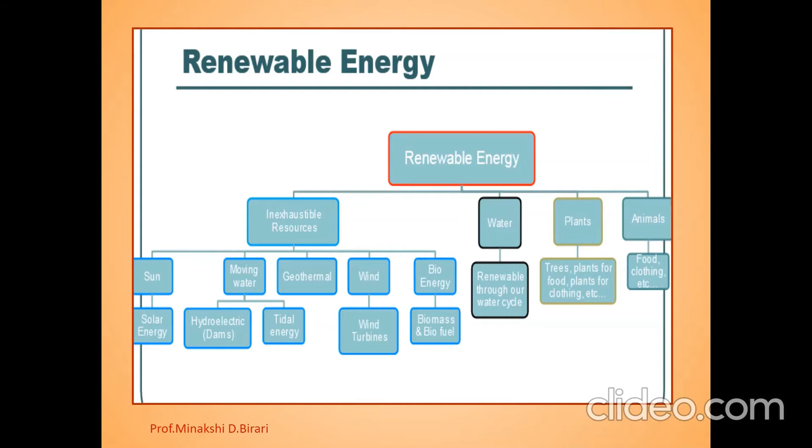On the other hand, renewable energies include solar energy, hydroelectric energy, tidal energy, wind power, biomass and biofuel. So these are the various renewable energy resources. Here we are talking about energy coming from solar rays, wind or water cycles, all theoretically unlimited on a human timescale.

Renewable energy resources include geothermal energy, biofuel, solar power, hydroelectric power and wind power.

Renewable energies are also often referred to as green energies or clean energies. Still, this doesn't mean that these energies aren't harmful to the environment and have zero impact. Nonetheless, they have a low environmental impact compared to fossil fuels. That's why they are increasingly becoming important elements in terms of sustainable development.

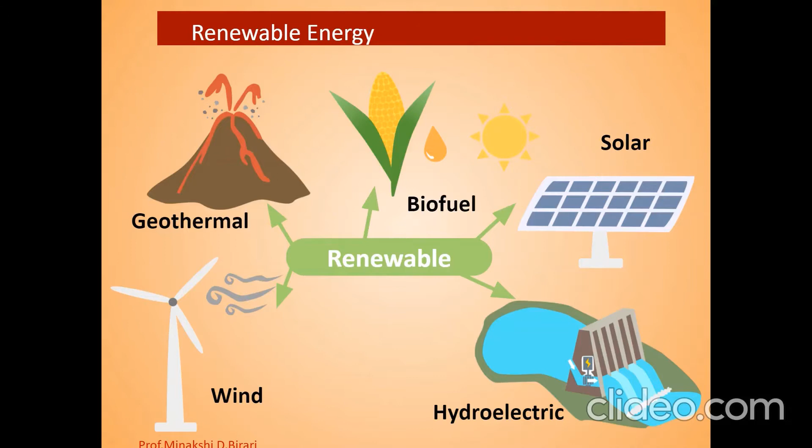We know that non-renewable energy sources won't last forever. Once we have used up our supply of oil, gas, coal and uranium, there will be no more. Because of the planet's increasing energy demand, we need to look for different ways of producing energy that is sustainable.

Renewable energy sources such as wind power, solar power, wave power, and geothermal energy are sustainable as they will not run out and can be reused again and again. That's why they are increasingly becoming important elements in terms of sustainable development.

Also, renewable energy resources do not release harmful greenhouse gases into the atmosphere, so they are much more environmentally friendly compared to non-renewable energy resources. Non-renewable energy resources can emit harmful gases into the atmosphere, whereas renewable energy resources do not release harmful greenhouse gases and pollutants into the atmosphere.

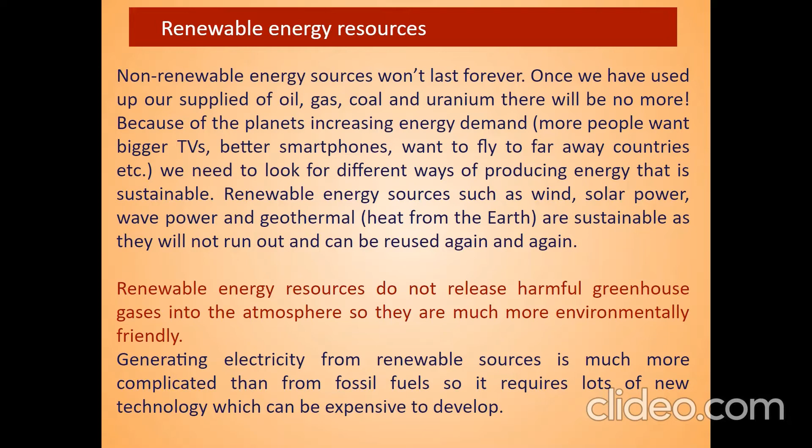Wind energy is a free renewable resource, so no matter how much is used today, there will still be the same supply in the future also. Wind energy is also a source of clean, non-polluting electricity.

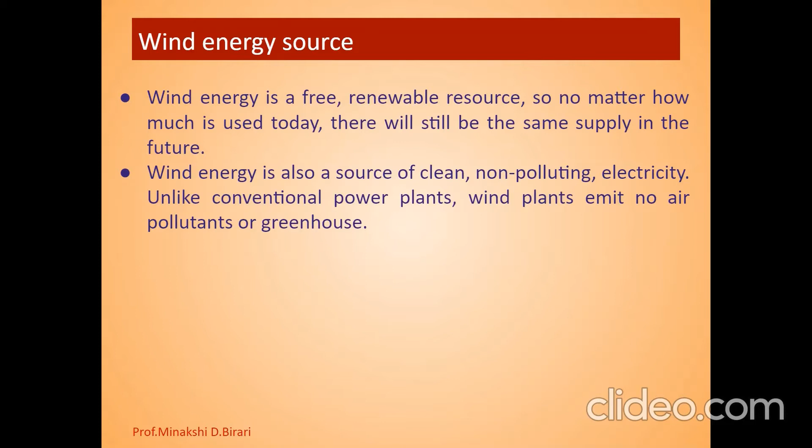Unlike conventional power plants, wind plants emit no air pollutants or greenhouse gases. It is a clean fuel source. Wind energy doesn't pollute the air like power plants that rely on combustion of fossil fuels such as coal or natural gas, which emit particulate matter, nitrogen oxides, sulfur dioxide, causing human health problems and economic damages.

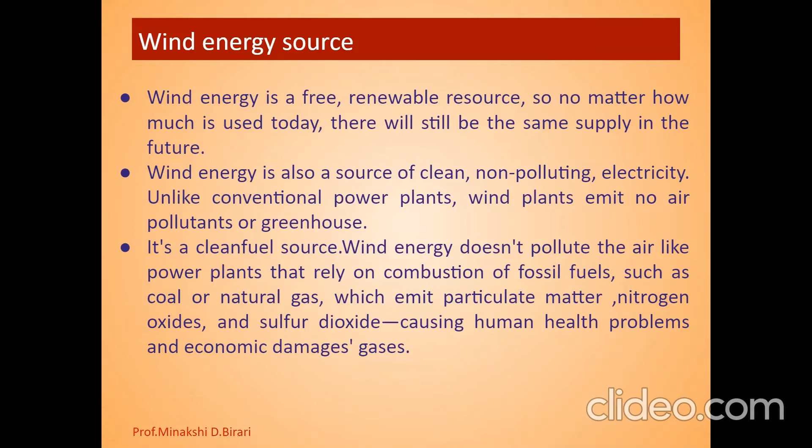Large windmills are called wind turbines. When the wind blows, the blades move and this spins a turbine which is connected to a generator which generates electricity. Wind farms are made up of lots of wind turbines, allowing lots of electricity to be generated. Wind farms are built in windy areas because if there is no wind, there is no generation of electricity.

Wind power is another renewable energy resource. The wind's kinetic energy makes turbines spin, creating mechanical movement, and afterward a generator transforms this mechanical energy into electricity. There are several types of wind renewable energies: onshore wind turbines, offshore wind turbines, and even floating wind turbines, but the operating principles are basically the same for all these types. We should remember that if there is no wind, there is no generation of electricity, so wind farms are built in windy areas.

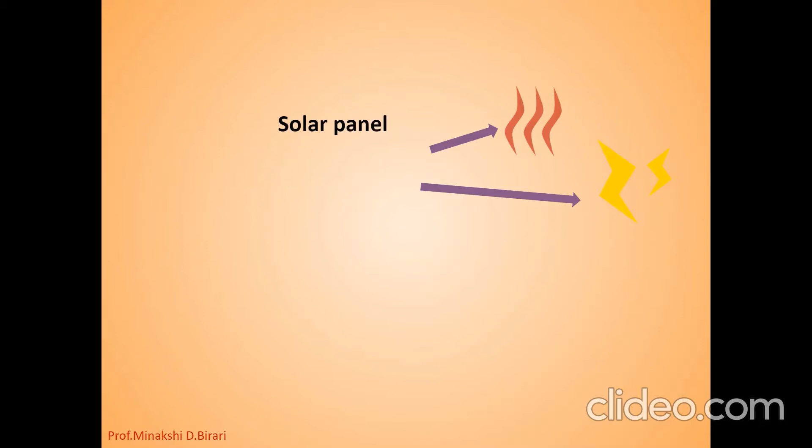This type of renewable energy comes directly from the capture of solar radiation. The solar radiation is absorbed by specific sensors using two possible operations: capturing sun rays and directly converting them into energy through photovoltaic solar panels, and also capturing, collecting and turning the sunlight into heat that warms up water or air. So these are the two operation modes by which sunlight is useful to generate heat and electricity.

Solar energy is from sunlight. Solar energy can be used to generate heat or electricity. Solar panels which are filled with water are used to produce heat. Photovoltaic cells are used to turn sunlight into electricity, capturing sun rays and directly converting them into energy through photovoltaic solar panels.

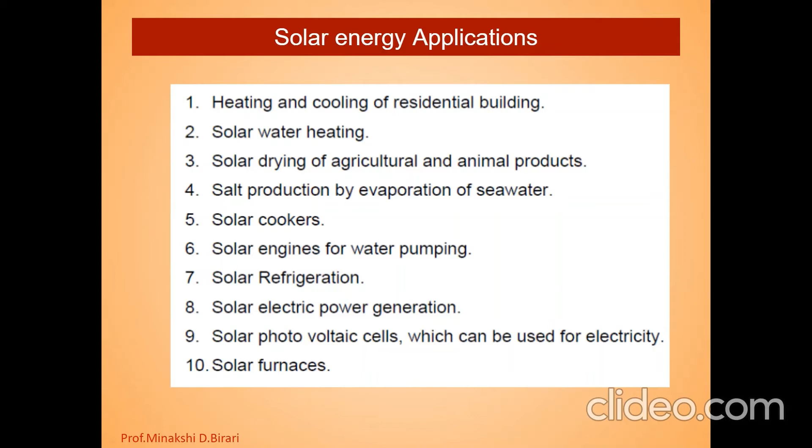Now the another renewable energy resource, that is geothermal energy. Geothermal energy is heat from within the earth. Geo means earth and thermal means heat, so geothermal energy is heat from within the earth. The earth generates and stores geothermal energy. We can recover this heat as steam or hot water and use it to heat buildings or generate electricity.

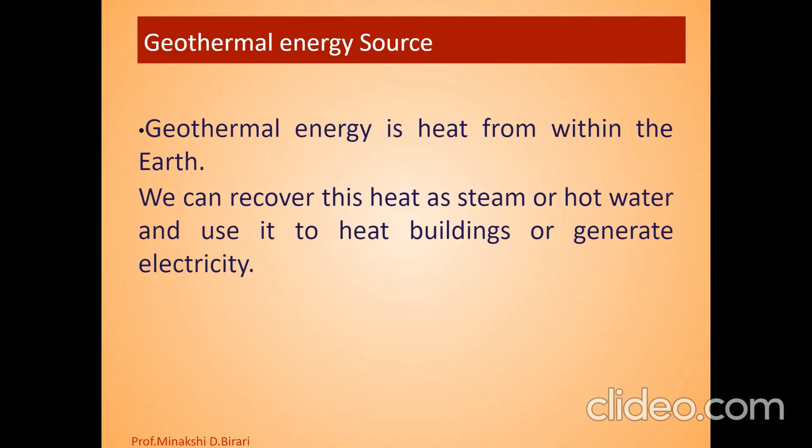The earth generates and stores geothermal energy. In other words, radioactive materials decaying inside the earth are emitting energy. Electricity can be created using this energy directly or indirectly, depending on the technology implemented. There are three main ways to use geothermal energy: first, generating electricity directly from the earth's heat; second, producing heat directly from hot water boiling on the planet's surface; and third, using pumps over the shallow ground to heat or cool buildings.

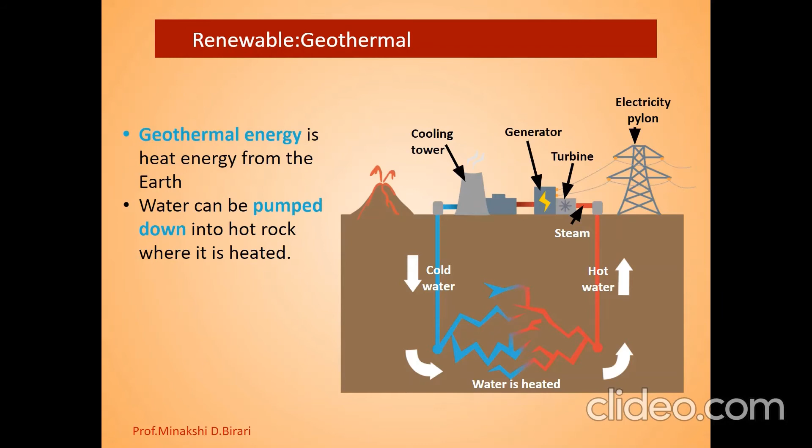Geothermal energy is nothing but the heat energy from the earth. By using earth's heat, we can generate electricity directly. Water can be pumped down into hot rock where it is heated. Geothermal energy can be used to produce heat or also electricity, so it is also a renewable energy resource.

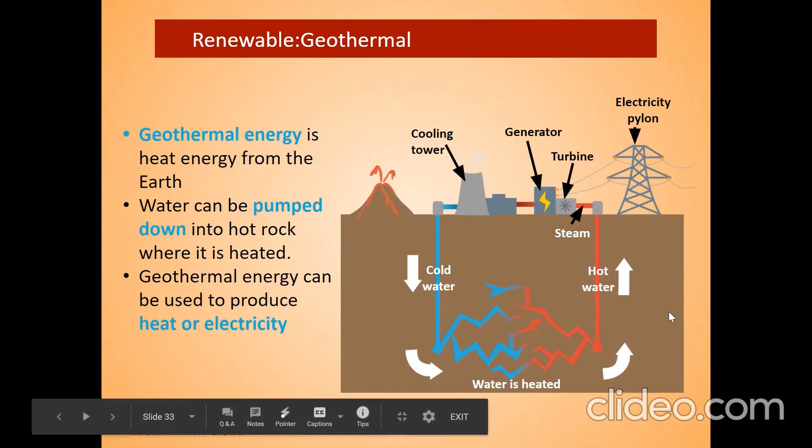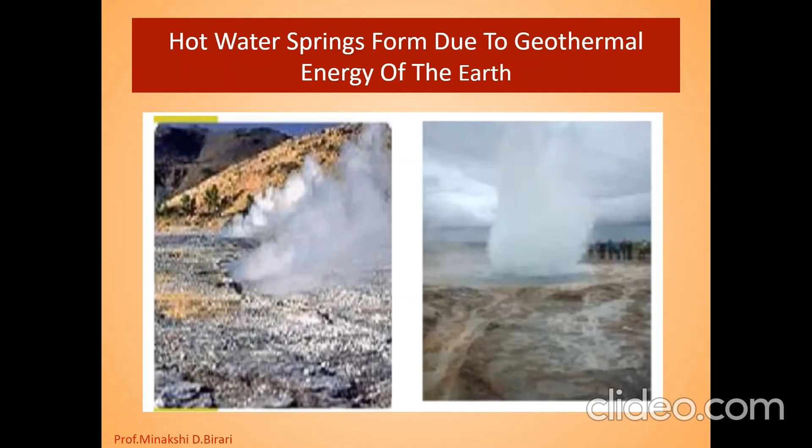Now the another renewable energy resource, that is biomass energy. Biomass is made up of organic materials from plants or animals that contain stored energy. The combustion of these natural materials produces renewable energy - organic material that comes from plants and animals, and it is a renewable source of energy. Biomass contains stored energy from the sun; plants absorb the sun's energy in a process that is nothing but photosynthesis. When biomass is burned, the chemical energy in biomass is released as heat.

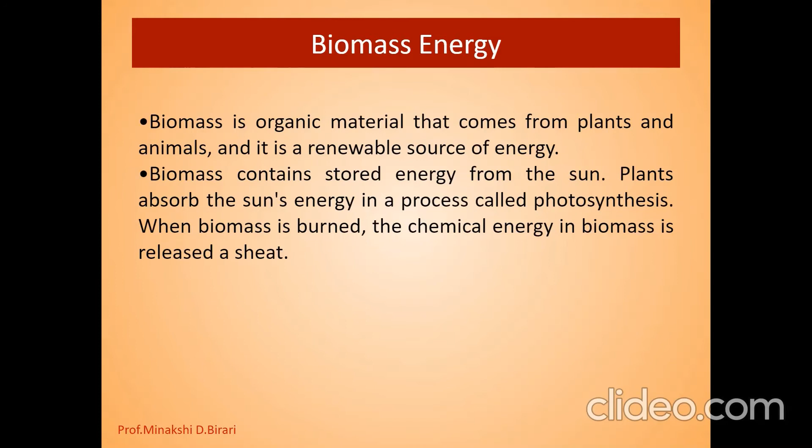So these are the types of biomass: wood fuel, rubbish, alcohol fuels, landfill gas, and also crops. These are some examples of generating energy from biomass: directly burning solid biomass like garbage or wood to produce heat; also converting biomass into biogases such as methane or CO2 due to bacterial activity that happens in the absence of oxygen, as is the case of landfills; then using sugar or corn crops to create biofuels such as bioethanol or biodiesel and mixing them with fossil fuels afterward. As a matter of fact, the world's biofuels production increased by 3.5% in 2017.

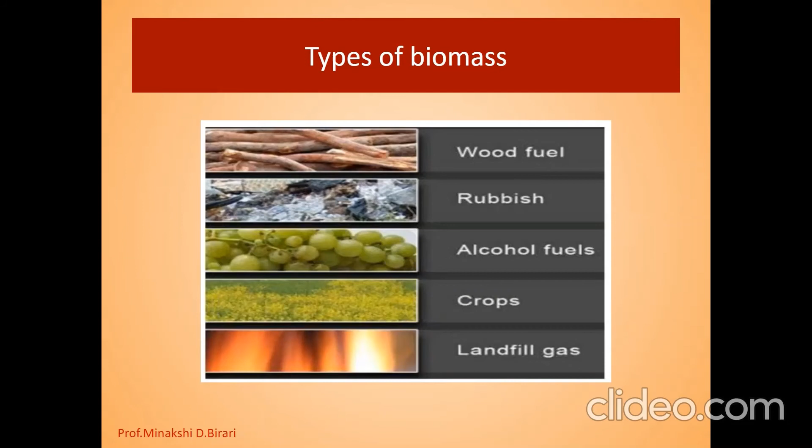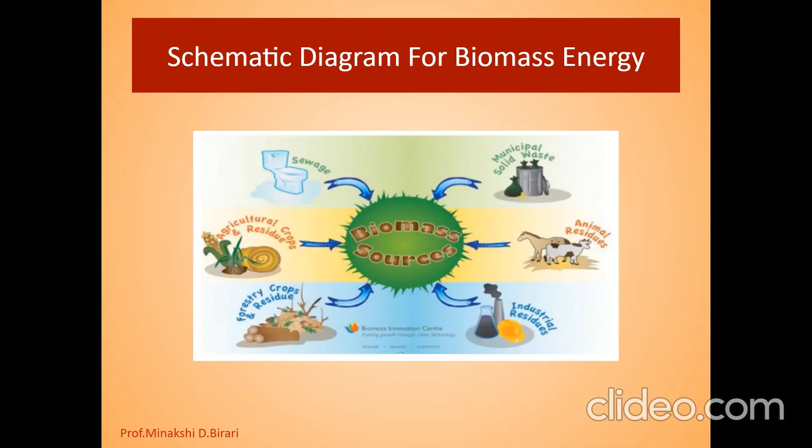Now the another renewable energy resource, that is biofuel. Biofuels are made from crops. Ideally, biofuels should be carbon neutral, absorbing carbon dioxide as they grow and then giving off carbon dioxide when they are burnt. However, fossil fuels are used in the production of biofuels, for example in making fertilizers, so they are not carbon neutral.

So simply, biofuels are made up from crops, and biofuels should be carbon neutral. Crops for biofuels could be used to feed people instead.

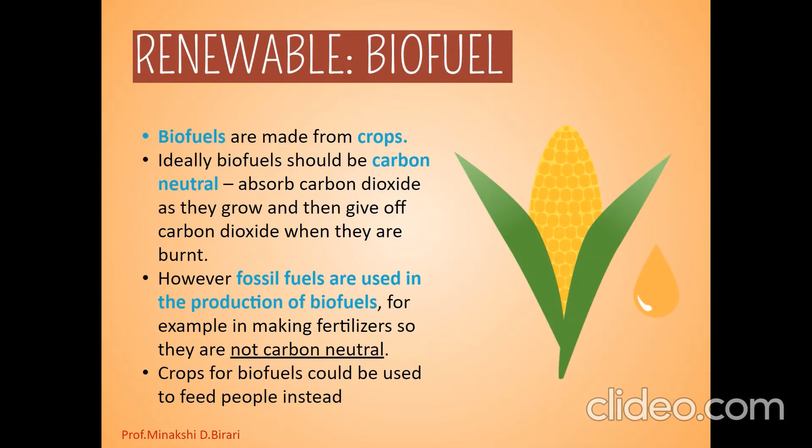The another energy resource, that is hydroelectric power. Hydroelectric power is a way of harnessing energy from running water. Hydroelectric dams trap the water in reservoirs. When electricity is needed, water is released and flows downwards with gravity to spin a turbine, so that it is more reliable as compared to solar and also the wind power.

Hydroelectric power consists in the transformation of the kinetic energy of the water into mechanical energy by turbines. So hydro means water, electric power means electricity. To generate electricity, water will be used. So the different reservoirs of water, that is river, dams, marine or the tides, in that the transformation of kinetic energy of water occurs into mechanical energy by turbines.

Hydroelectric dams are very expensive and can harm wildlife also.

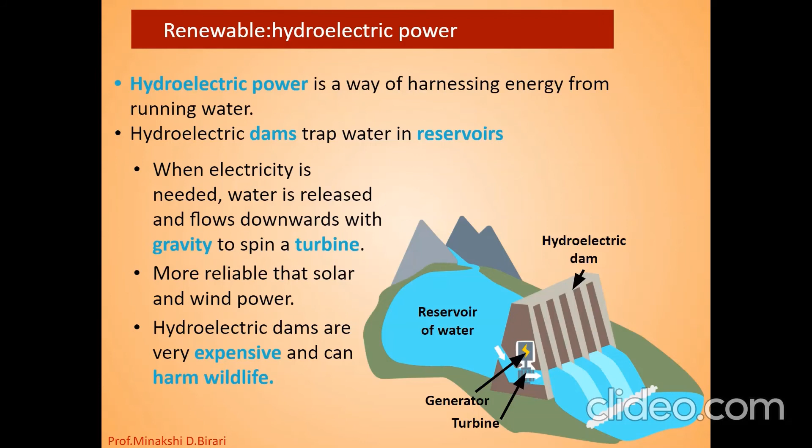So we have discussed the various examples of renewable energy resources. So let us see what are the advantages of renewable energy resources. One of the major advantages with the use of renewable energy is that, as it is renewable, so it is therefore sustainable and will never run out.

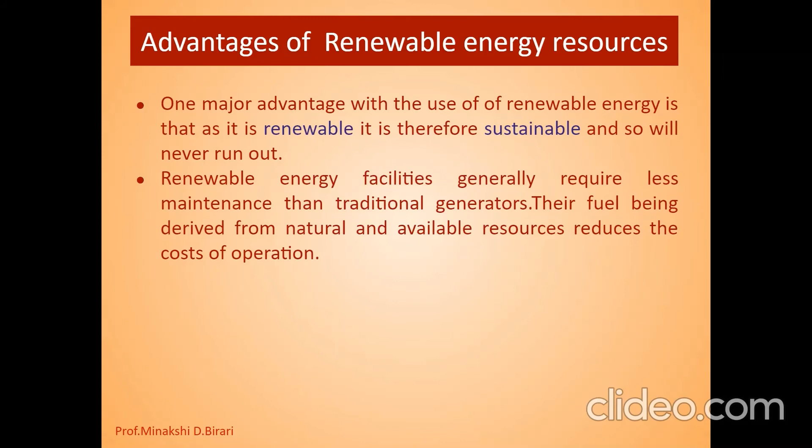Renewable energy facilities generally require less maintenance than traditional generators. Their fuel being derived from natural and available resources reduces the cost of operation, and renewable energy produces little or no waste products such as carbon dioxide or other chemical pollutants, so has minimal impact on the environment.

Renewable energy resources cannot emit pollutants into the atmosphere as compared to non-renewable energy resources. Renewable energy projects can also bring economic benefits to many regional areas. So these are the various advantages of renewable energy resources.

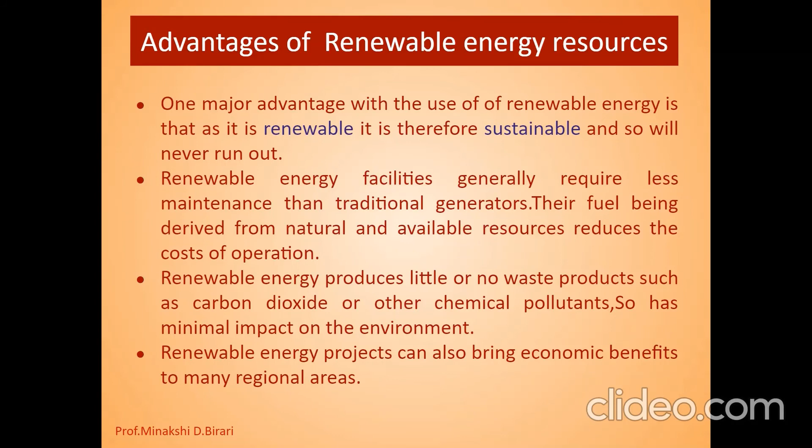The renewable sources are also cost effective and user friendly. By promoting renewable energy sources, we can avoid air pollution, soil pollution and water pollution, because renewable energy sources cannot emit pollutants into the atmosphere as compared to non-renewable energy resources. Country's economy also increases by the use of renewable energy resources. Throughout the year, these sources are available without affecting the environment. So these are also the advantages of renewable energy sources.

So already we have studied non-renewable energy resources in detail, and in this lecture we have studied renewable energy sources. So what are the differences between renewable and non-renewable energy resources? Renewable energy resources are those that can be renewed or regenerated, these are called renewable resources, whereas the resources that are present in fixed quantities are called non-renewable resources.

Renewable resources are inexhaustible, whereas non-renewable resources are exhaustible. Renewable resources are not affected by human activities, whereas non-renewable resources are affected by human activities. All biotic resources are renewable resources, for example air and water, but some abiotic resources are non-renewable, for example fossil fuels and minerals.

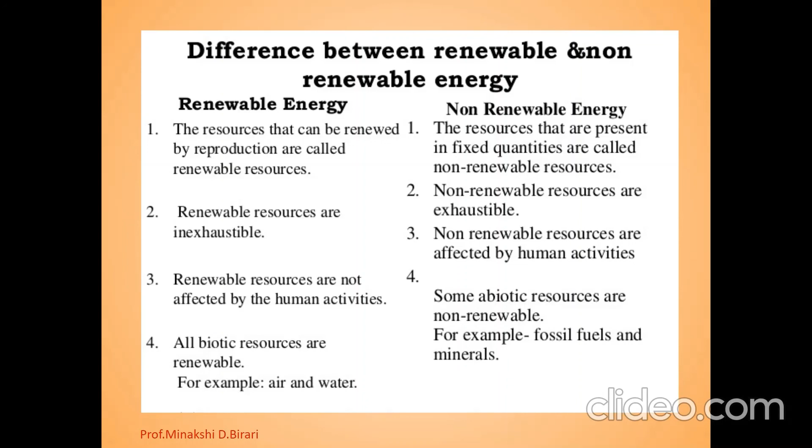So we should remember the difference between renewable and non-renewable energy resources. So we have studied both kinds of energy resources, that is renewable and non-renewable energy resources.

Finally, we can conclude that we are on peak of using our energy resources, and this is very much clear from previous discussions that our non-renewable resources are on peak of their use, and one day ultimately they will vanish from existence in the world. So we need to develop our renewable energy resources more and more if we want to enjoy a peaceful and satisfactory life in today's energy hungry world.

Therefore, for sustainable environmental development, conservation and management of natural resources and energy resources is very necessary. So we have discussed in detail about energy resources, the types of energy resources, that is renewable energy resource and non-renewable energy resource. In the next lecture, we will discuss another natural resource in detail.